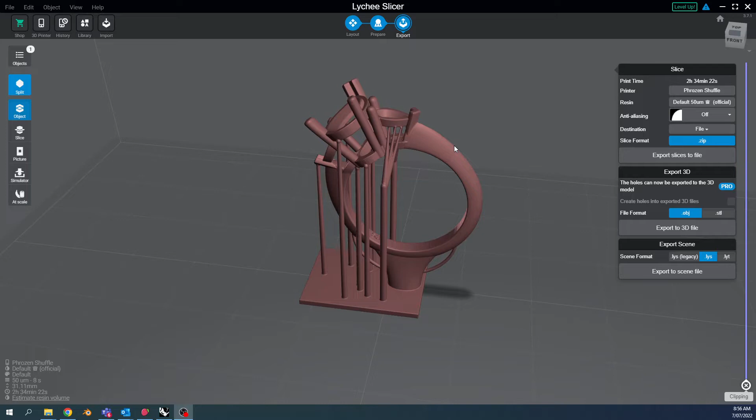You'll have heard in many of my videos I talk about slicing. Slicing is where a piece of software, like the one we're in now, Lychee, draws a line through the model and takes a photo of it as an image. So Lychee allows us to visualize that, and you can actually see how this is going to print. Each of those little lines is saved as an image, and there'll be thousands of these images stacked on top of each other for every layer that's going to print.

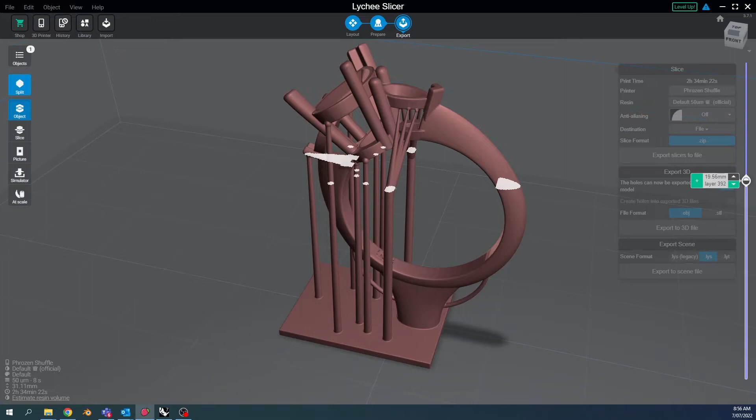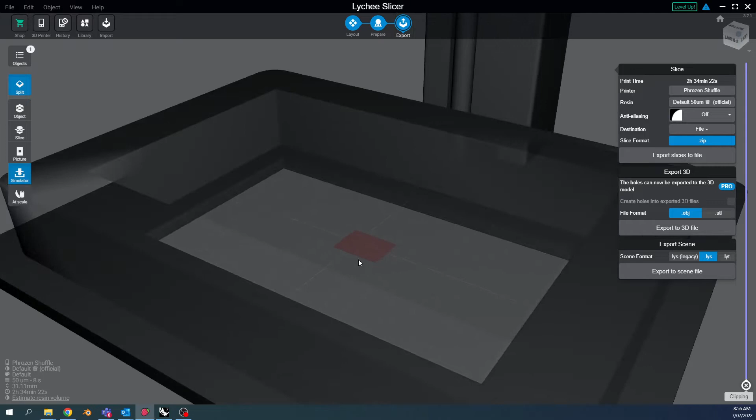Now, we look at this as a ring facing up, but in the real world it actually faces upside down. We've got a simulator that allows us to simulate this. You've got a tank of resin here, and your first layer is a rectangle, which you saw in the last video. If we look from underneath, there's a projector projecting that red image, and as the print gets taller and taller, the part starts coming out of the resin like this, image by image by image, exposed.

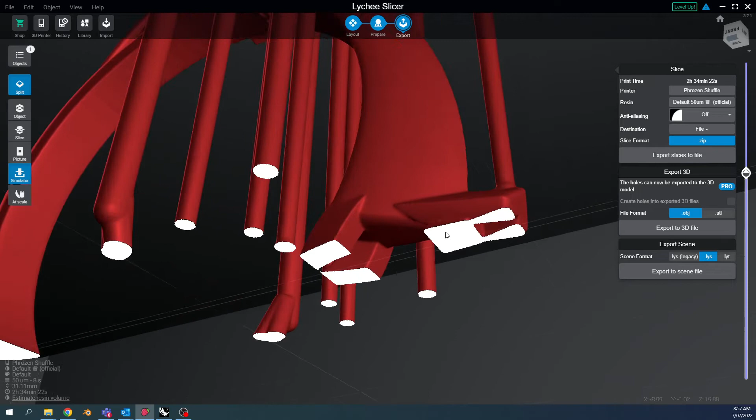So the advantage of the fact that this is an image - if we zoom in a lot, you'll see that by the time it draws a line, there's a lot of jaggies. You see that's jaggy, jaggy, jaggy, jaggy.

You'll see there's an anti-aliasing on/off toggle. You don't see it in the preview, unfortunately, but it does save the file with anti-aliasing - literally the same as in Photoshop. If you anti-alias an image, it finds the edges and smooths them out, so you're going to have less model fidelity. It draws a line between here and here and averages all the points in between. So if you had writing inside here, you may lose some of the writing.

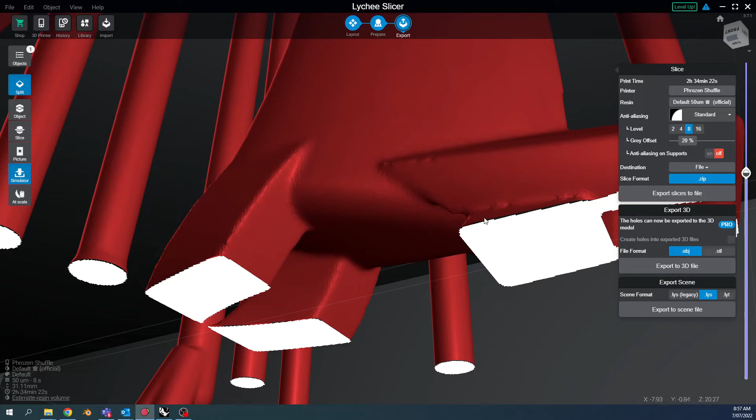Over here it's more obvious what the advantage and disadvantage are. You can see that at this particular angle, this model at this resolution would have a lot of jaggies, especially round stuff. You've got to remember this is a 0.3 millimeter post we're looking at, so in the real world your eye can't even see that.

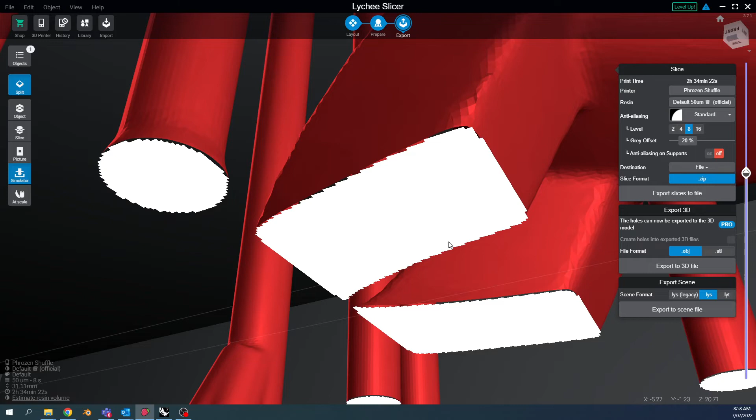The anti-aliasing I described in my videos is the evening of this image. It averages the image into a smoother shape, and by doing that it averages the part. So very fine detail on the inside of the part, text, etc., will tend to get averaged out.

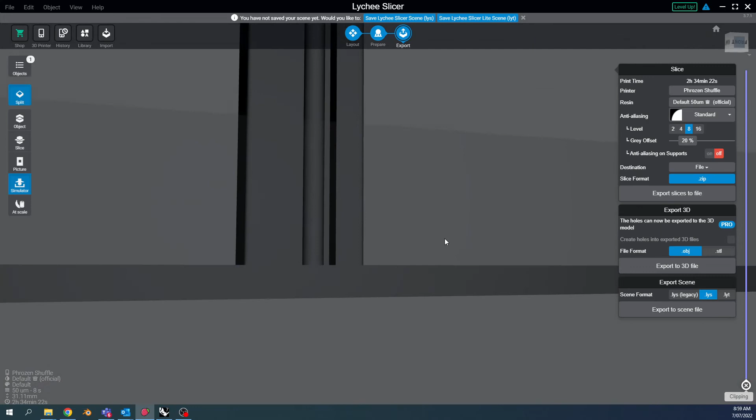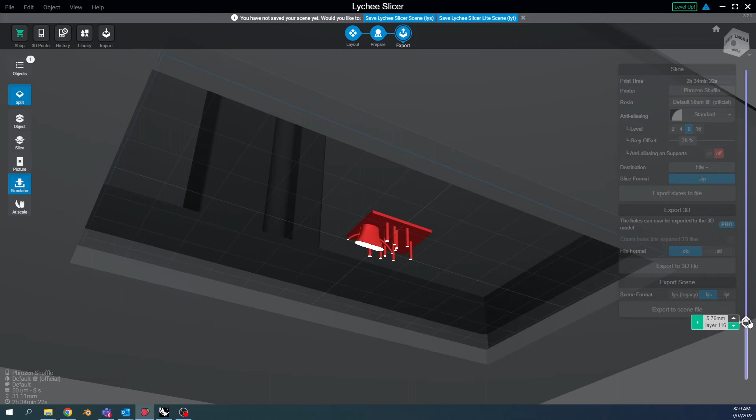So there is a layer count on the side there. So the part is growing up like this.

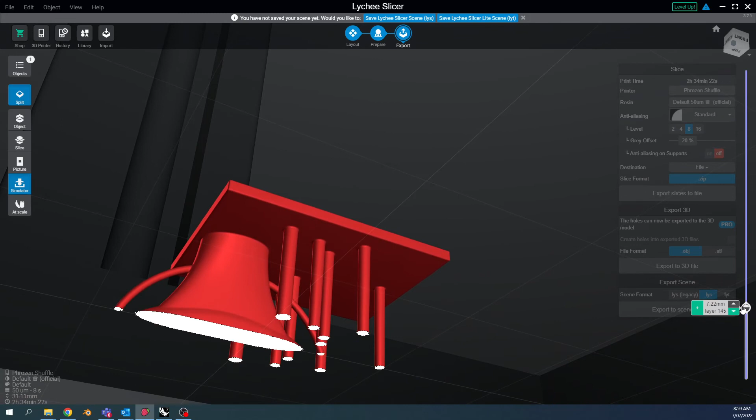And what all those supports are for is so that once the ring gets up to the point where you've got these additional parts coming in - you'll see it in a minute, it'll make more sense - at that layer there was a very long, thin piece of resin sticking out here, and the resin's soft while it's printing and very flexible, so the chances of that coming out warped or poor are quite high. So we start building a support to touch off on that, to give it a little bit of support so that the flexing of the printer doesn't damage that part, and this is holding it down over there.

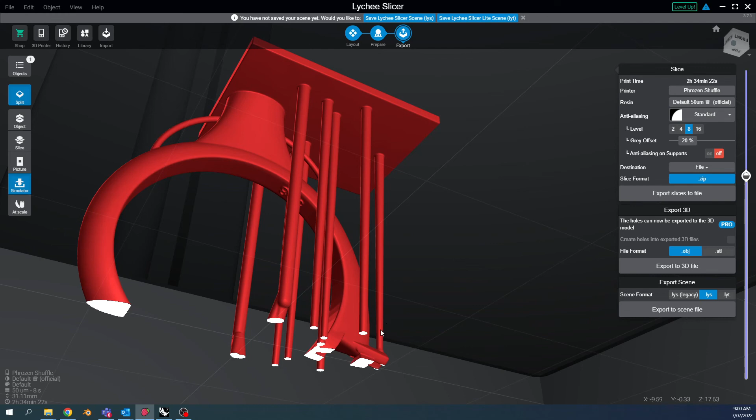And similarly, as the part continues growing higher and needs more supports here and here, you'll see what the function of the supports are - they just help it not fall apart through the grow process. And then you can see the images we're talking about and the anti-aliasing we discussed, and then the part is finished.